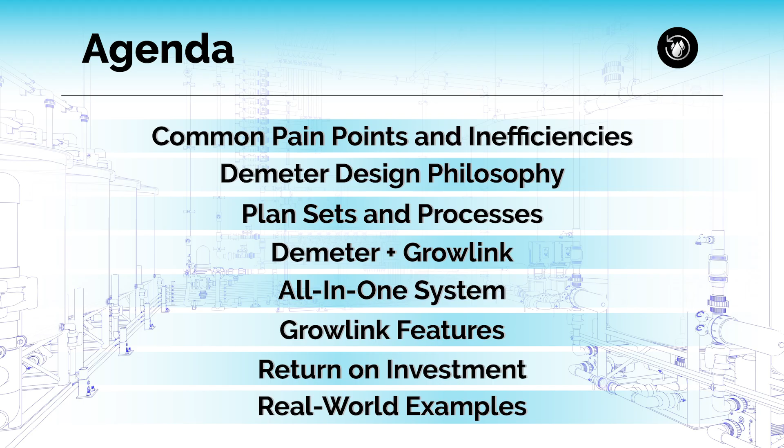Thanks for joining us today. This webinar is for owners, operators, and growers to understand how a properly designed irrigation system can help you become more profitable. We're going to be covering how plumbing and irrigation design, along with proper controls, improves efficiency and yields. Very often we still see lighting, mechanical, benching coming first, and no thoughtful irrigation design, maybe no dedicated water room, kind of being an afterthought after some of the big ticket items, and rightfully so.

But even after all these years and a lot of advancements in automation, we oftentimes see a total lack of thoughtful irrigation layouts. The irrigation system is the lifeblood of the facility and should be treated as an important part of the design process, not an afterthought. Mostly people think, oh, maybe my plumber can just quickly install an irrigation system for me, and that's really not the case. We see these common pain points all the time in facilities, whether it's a new build out or an existing building, and I'm sure some of you can relate to what we're about to talk about.

Going into a new project with no plan set for irrigation, no materials list, and no direction, you're just relying on your plumber who is not an irrigation expert. Or we've built facilities before, we'll just figure it out. Well, this worked here, maybe it'll work here, but you're scaling up tenfold, and it's just not the case. And then going into it with no parts list and no direction, you're going to overbuy or underbuy, and it's going to delay the project, and you're going to be wasting money on that build out in time spent and labor trying to figure out how to get this system together.

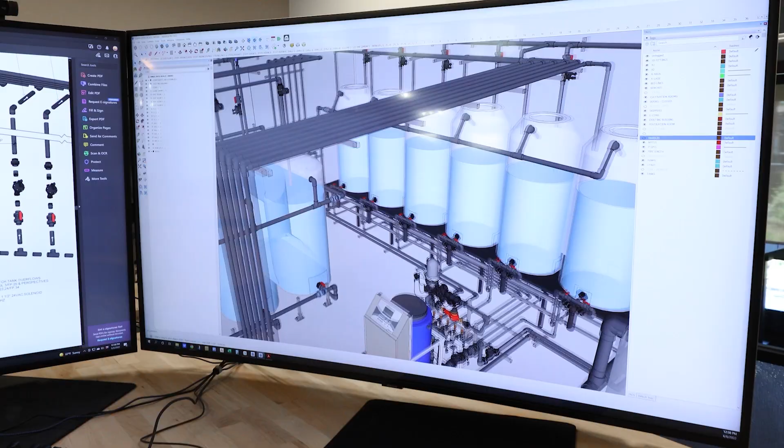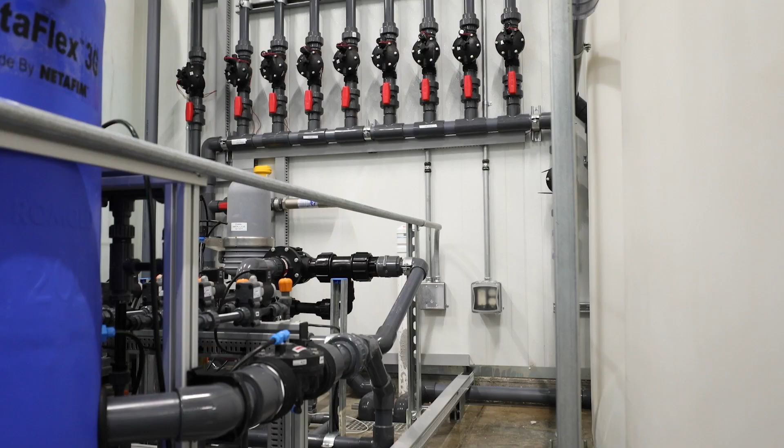Yeah, absolutely. As a cultivator myself, when I'm designing, I'm thinking about this as my facility, this is how I would want to run it every single day. When we're designing the fertigation room, we're looking at processes. Okay, we're going to bring in nutrients through this door here, going to concentrate stock solution here, moving into fertigation, moving into batch as an even nice flow for the room, putting valves in places where they're easy to access, where maybe some designers just aren't thinking about that from an operator standpoint.

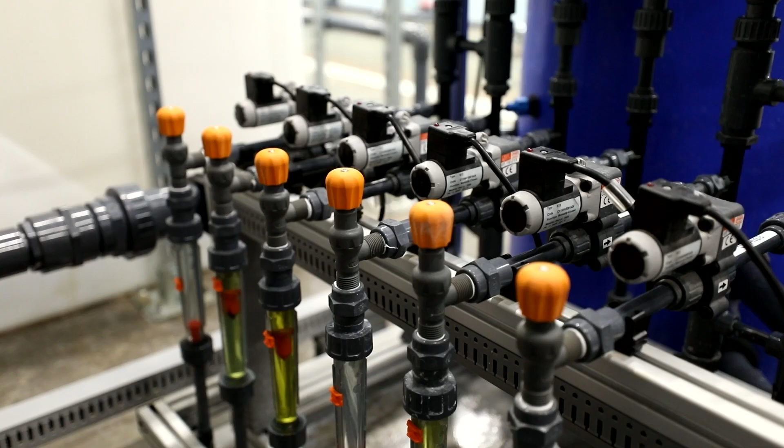Like, hey, we actually have to use this system. Somebody has to get up to that valve above the tank that's 10 feet tall and turn it. No, that doesn't work. So treating it like it's my own gives the operator such a nice facility to run that they're going to want to be in.

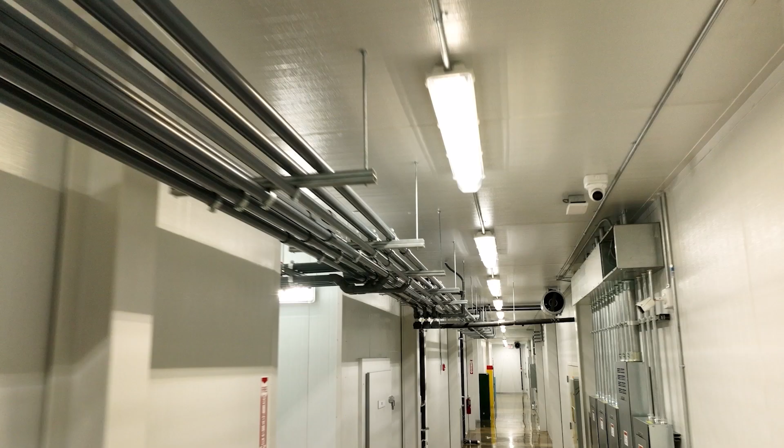They're not going to be cursing every single day when they're in there getting the fertigation room running, and also building that room efficiently so you're not spending a lot of time in it. Having the right systems in place allows us to make a room that is so efficient that all you really need to be doing in there is making sure your stock solutions are full, and you step away from the room once it's calibrated and ready to go.

Coming off of your philosophy, tell us what a typical design plan and the process behind that looks like. Yeah, the process is pretty simple and straightforward.

We work with you to figure out what your level of comfort is with technology, what level of automation you want to have in the building, what your budget is, and also what makes sense for the scale of the building. What works in a large scale facility is overkill for a smaller facility and vice versa. So that's something we definitely take into mind.

We go through that design conversation in the beginning. It's a 1 to 2 hour phone call with the customer, and we talk about all the features and additions that they could ever want in the facility. Like, was there something in the past that you wish you had, or is there a feature that you dreamt about that you wish you had? We'll come up with that new solution for you.

Not every one of our plan sets is cookie cutter. As a matter of fact, no plans from us are cookie cutter. Every facility is designed one-off for the customer every single time to meet their needs and their requirements for their style of growing.

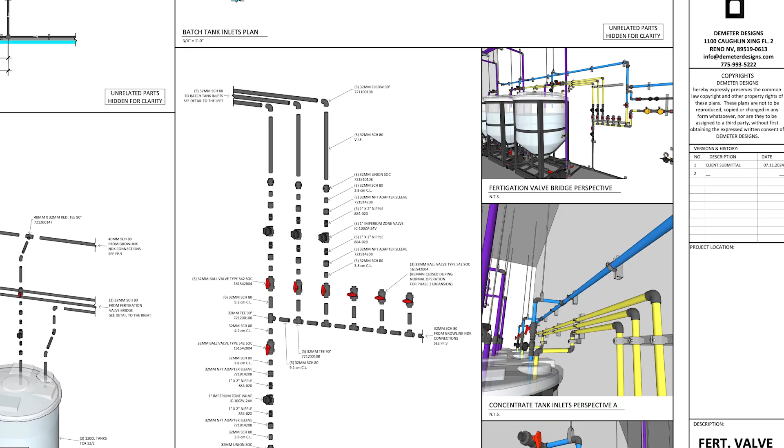So phase 1 is here, this is where we stop the scope of the phase, and then we pick up here. We'll separate the parts list, we'll break apart the plans so your plumbers know, okay, we're going to start here for phase 1, and we pick up phase 2. We already know what we need to purchase and what that design looks like, so we can easily move forward with it.

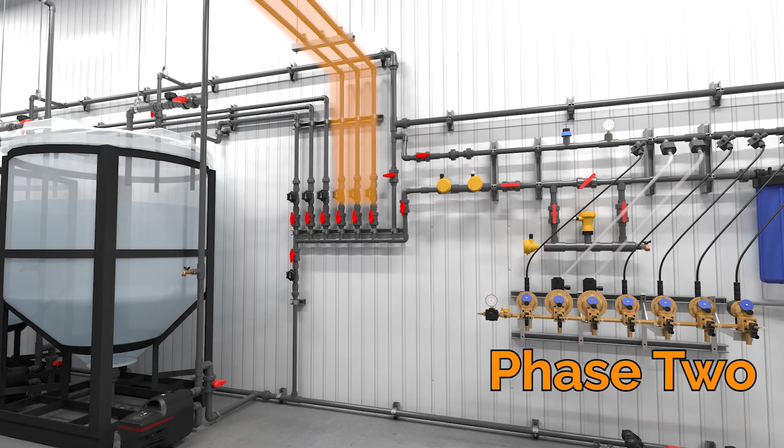Also, in that phased construction approach, I think it's very important the way that we design it does not interrupt phase 1 when we go into phase 2. You can kind of continue operations, easily almost copy paste into the next phase.

And we don't ever have to take anything offline. Phase 1 just keeps running, and we plumb right into it and open a valve, and it continues down the way. That's great, no downtime. That's really important when we're operating at scale.

What our plan sets look like, they're much, much different than anybody else's plans. I think we have the most detailed plan sets in the industry, and what that leads to is labor savings and cost savings on installation. No mistakes, no missing items, no 'hey what am I supposed to do with this, ball valve or...'

And if you're hiring a plumber and say you're out of the country, chances are they've never seen anything like this before. They have zero experience with any irrigation or fertigation plans or design. So we keep that in mind when we're designing these plans. No matter where you are in the world, I say this to everybody, if you can read a tape measure and you can cut and glue pipe, you can install our systems. I think that's really important.

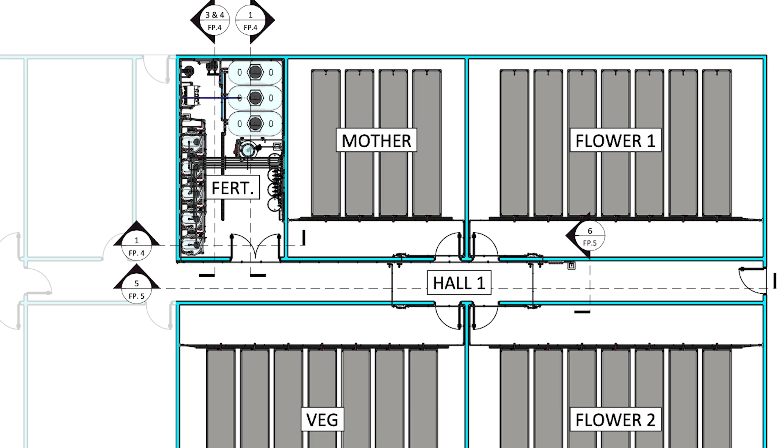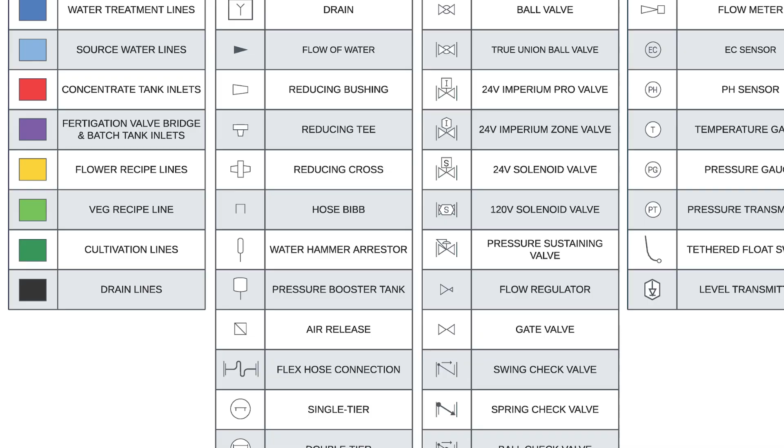So what that looks like, we have our floor plans and elevations, which are standard in every plan set. We provide process instrumentation diagrams, which are simple line drawings. It shows the pipe diameters and the flow and where all the equipment call-outs are, what your wire tags are. So when we're talking with GrowLink, when your low voltage installers are wiring everything, it's the same on the plan sets as it is in the panel. That's important.

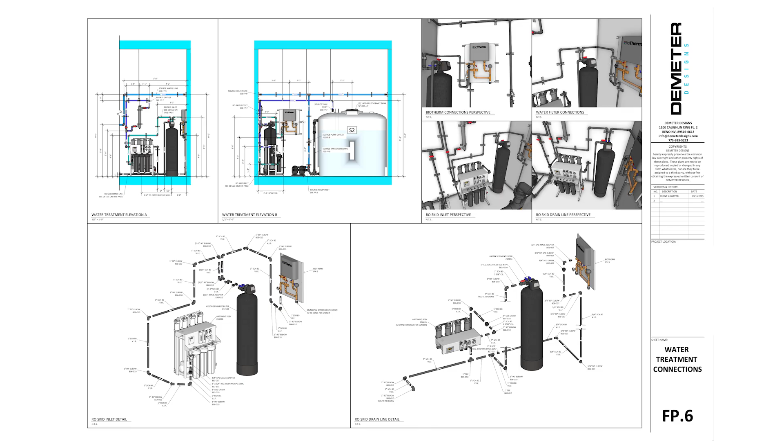And then we go into our assembly sheets. This is the bread and butter of what we do, and this is what makes it so anyone in the world could install our plans. So we take every single assembly from the RO holding tank all the way to the dripper on the table, and we break it into small chunks into these assemblies.

Easy to digest, almost phasing the installation within the diagram. Correct. It's your day 1, I'm starting here. Day 2, I'm going here. And it turns it into a Lego set or an IKEA set of plans that allow you to easily see what you need to do for the day.

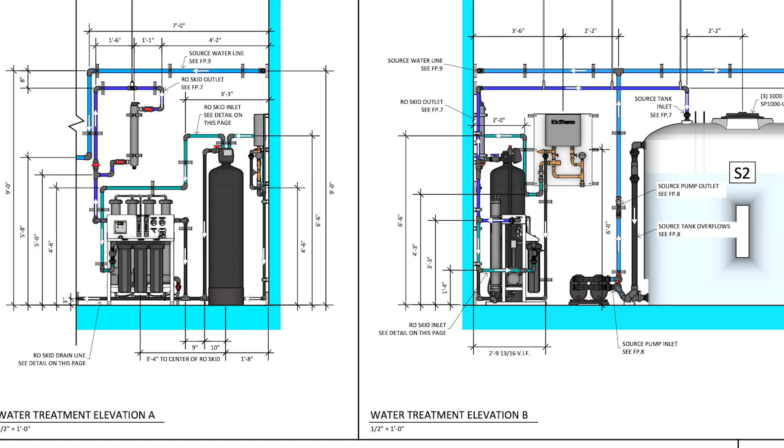There's a floor plan and an elevation showing that assembly. There's a 3D exploded diagram of that assembly that shows you how to build it down to the cut length of every single section of pipe, accurate within 1/16 of an inch. And what's showing up on site is basically perfectly aligned with what's on the diagram.

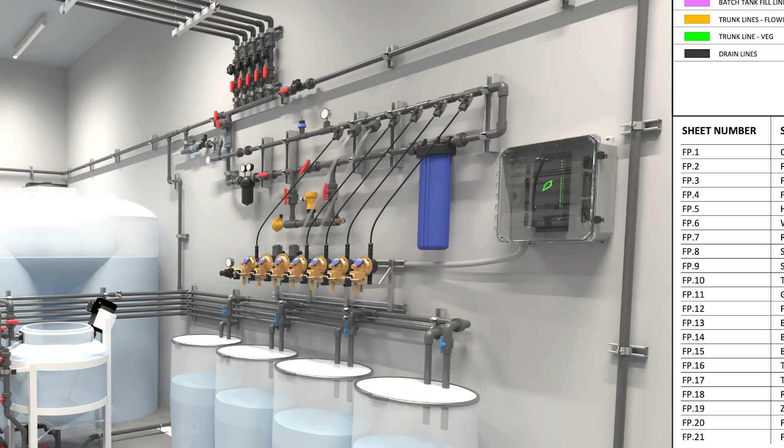Correct. And on that sheet, we have a 3D perspective view of what it should look like when it's completed. Before anything's ever built, we show you what it should look like when it's done. So we do that, again, from the RO holding tank all the way to the dripper on the table.

We also include a complete bill of materials. Every single part and piece that you need to build out our system—every elbow, T, valve, tank. Kind of lay everything out and look at it before you even start on day 1.

You know that when that equipment arrives, your installers have zero excuses, right? Here's your Lego set of plans, here's your pallet of materials, it's all accounted for, get to work. Because when an installer doesn't think of all the materials that they need—which is impossible without a fully engineered plan set.

How many quick trips to the local hardware store or plumbing store are you going to make to get that one thing you forgot? Hopefully they have it in stock. And then productivity is lost.

When you stop your workflow for the day as an installer and you go to the supply house and come back, you've got to get back in the groove again. So it's not just a quick trip to the store—you just lost an hour or two of productivity, maybe even a day or two. Especially if things are out of stock. So making sure everything is there on day one when you start the build out is instrumental to saving money and being efficient in that process.

Elaborating on all of that, we also do equipment procurement for our customers. We sell all of our equipment at wholesale to the customer. Huge, right? When you're buying things from your plumbers, they're charging you retail plus their markup. So the money you're spending for the plans is almost immediately saved in the materials, not to mention the labor savings on top of that and making sure the installation is going seamlessly.

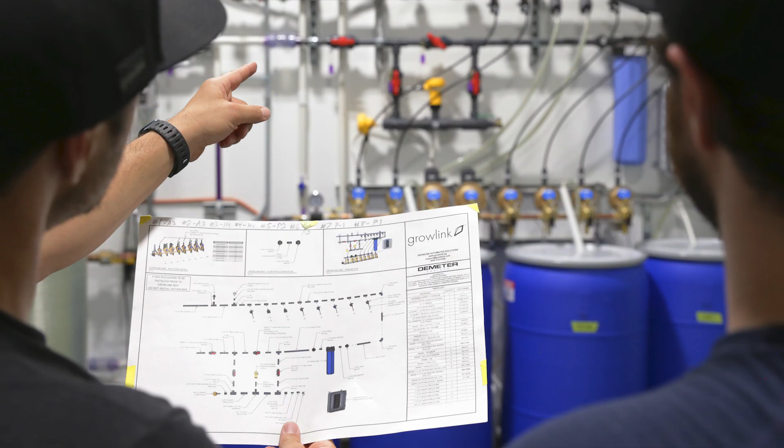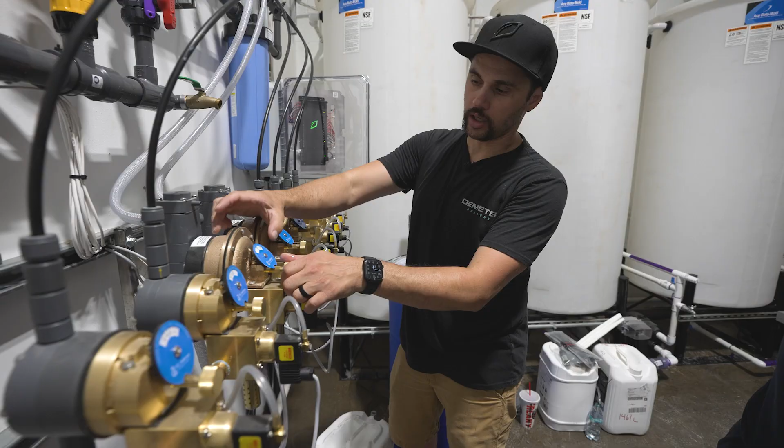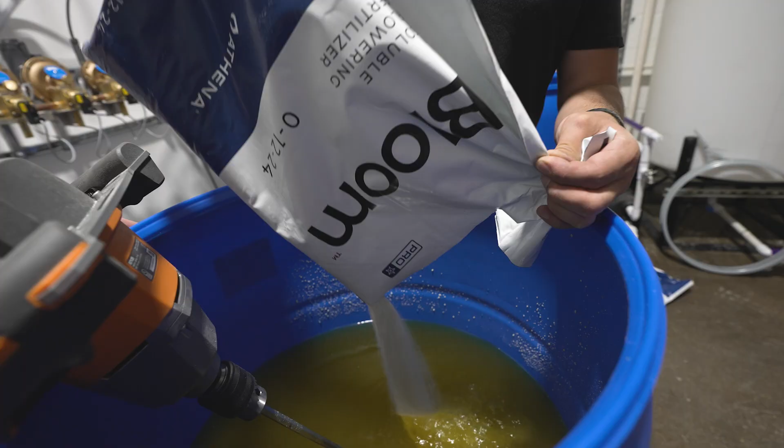We also offer installation support, installer recommendations, and on-site training and commissioning for the systems. As a cultivator myself who has used the GrowLink platform for a few years, I know that system inside and out. When I get on site, I'm going to help start up that system, calibrate all your pumps, do all your valve validations, train you on all your SOPs, do all the pump calibrations, build your recipes with you, build stock tank solutions—everything to get that water room up and running and moving water to the rooms. I'm going to help you start all that up.

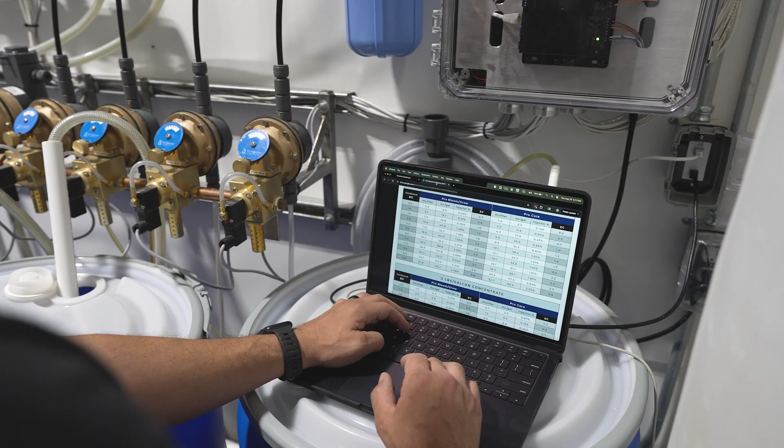And then I'm going to train you on the platform as a grower. These are things and tools that I've used in my day-to-day operations that make my life easy, and all these fail-safes that I've brought into place to make sure my garden is successful. So I can give that to you immediately.

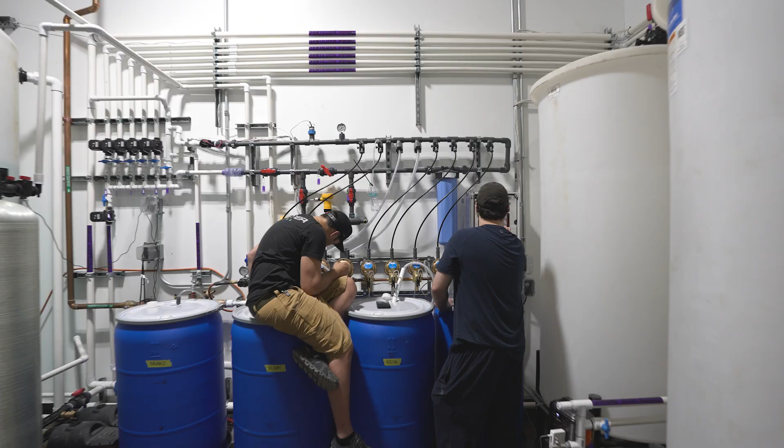I think that initial onboarding process is so important. I always tell people, we don't expect you to be experts on day one. This is an intuitive platform, something that's easy to use, but there's a learning curve—you've got to find out what it means to you and your facility. But I'll come in and shave 6 months of learning curve right off in the first week I'm there with you. That's awesome.

Yeah, that's a little bit about our process and how things work at Demeter Designs. Now that we've talked about my design process, let's talk about what the GrowLink Demeter process looks like in the background.

I think the biggest thing is we're so consistent and familiar with our approaches. I've got a pretty good feel for what your design philosophy is, depending on the size of the project—what's our cultivation strategy, what's the size unit or the model unit needed to make this all work in concert and harmony together. Ultimately, fewer meetings.

That's what we find this leads to the most. It is not uncommon to see Sean or myself introduce a project to each other, backdoor conversations happening where here's the size of the project, here's the valve schedule, here's the sensor layout, here's the size unit we need, what flow rate and recipe they're going to be using. Right away we come forth to the customer, if not the first meeting, with hey, we've already got a solution in place. We want to make sure this meets your needs, meets your budget, review it with you, and we're moving forward. A lot of times that's happening, if not the same day, within 24 hours.

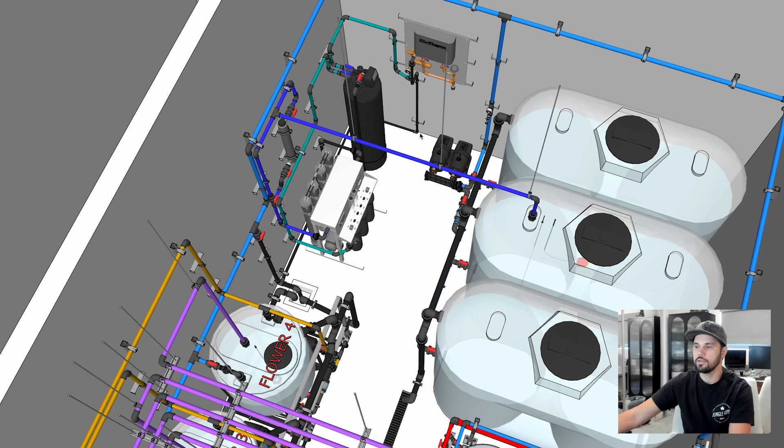I think between our process with the client, it's the first 2-hour meeting on what they're after, what kind of feature sets they want. We get to work, we build a 3D model, we have a 1-hour review, make sure the client likes it. From there, behind the scenes, the client's already done. There's no more meetings with the client that they have to sit in weekly or bi-weekly. We want your opinion on this, here's what we need from you. It's a couple hours, and then the customer can step away and concentrate on the rest of the build out. There's a lot of moving parts to this, so getting slimmer meetings is huge for everybody. Nobody likes being stuck in meetings all day.

And I think that's kind of the value play with working with both GrowLink and Demeter. You're getting a confident team that's worked on dozens of projects together, that has between us decades of experience that comes forward with a solution tailored to the project. So I think there's a really nice handshake between Demeter's design philosophy, the performance of our system, and totally closing the loop on having one platform, one set of voices or support opinions to work with that are meeting the needs of cultivation.

Absolutely. The biggest advantage of using GrowLink is having nutrient delivery, climate control, lighting control, irrigation, all of your sensor monitoring on one platform. Nearly every retrofit project we've come across, especially in recent years, a lot of them are using a different vendor for nutrient delivery. They've got a separate company for climate control, maybe a separate company for substrate monitoring, and a different company for irrigation control. So now you've got 4 different apps or 4 different portals to log into, on top of adding to the list of people that you need to call should you need support. I think that omni-channel approach creates wild inefficiencies.

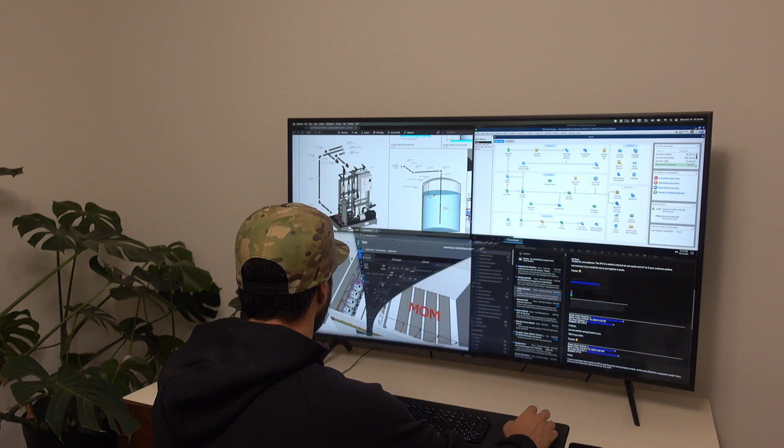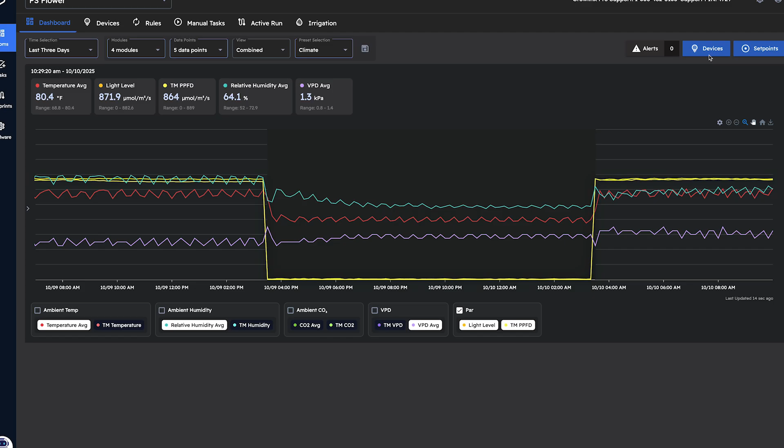that my facility is running properly. We use Blueprints, we use Copilot, we use all of these different platforms that are built in. So really all I have to do is for 5 minutes a day, I log in on the web portal, I go to my preset dashboards that I've already built, I check out my climate, make sure that those have all been trending for my VPD, my RH, my temperature, my CO2, make sure all of that's been in check, my lighting's in check, and then I bump over to my other dashboard, look at my drybacks real quick, make sure all that looks good for me.

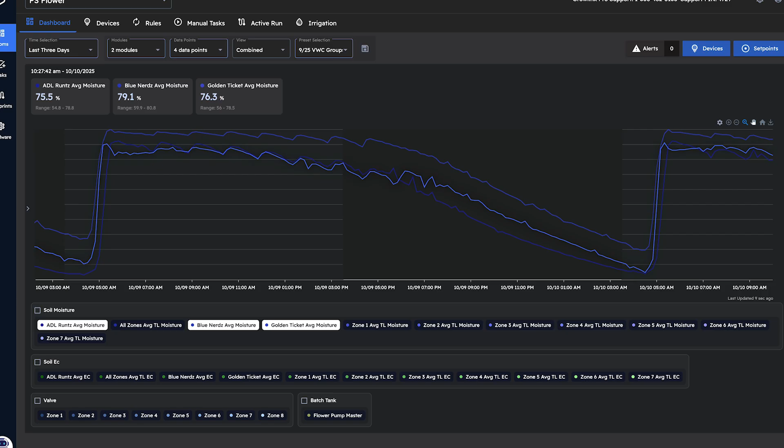I'm an irrigation nerd, so a lot of times I'm not using Copilot. I really want to tweak and manually adjust things on my own. So I'm looking at that sensor data from my TerraLinks and then making my decisions on what I want to do for the next day in the irrigation programs.

But I'm traveling a lot also for work, right? I don't have time to be a nerd all the time. When I do, I love it, it's kind of a luxury. Like sometimes you want to get in there and just play around. But when I'm traveling abroad in Europe for a trade show or I'm at a commissioning, I don't have time to do that. So I'll turn on Copilot with my set parameters and let it run, and it works amazingly well, right? It just takes that away.

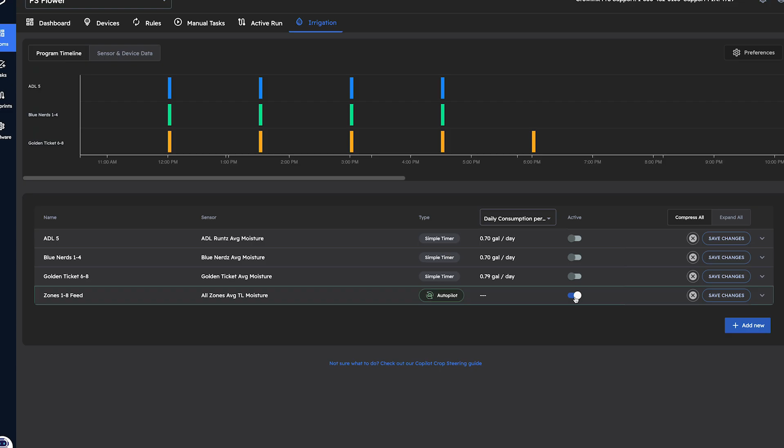And then the Blueprints, I set my day-to-day parameters for the entire grow cycle in one blueprint, and then when I plant the room, I just hit go. And I know that my climate settings, my lighting settings, everything is changing and shifting how I want it to day to day, and I don't have to manage a calendar and make all those manual set point changes every single day. It takes that off my plate.

So you basically could pre-program your entire cultivation cycle, upload it to your controller, and have peace of mind while you're on the road. Done. Yeah, and in 5 minutes a day, if that, I can rip through, make sure everything's operating properly, and then go about my real job, Demeter Designs, right?

Sure. And for the cultivator, when we're running a multi-room facility, having Blueprints in place, Copilot in place, takes so much labor off of the operator. It's crazy to me how much time you don't need to spend in there and how well the room actually runs.

Our R&D facility, when I'm on the road traveling, sometimes I'm gone for a week, 2 weeks, and I can comfortably walk away from the facility for 2 weeks at a time, and I know that my grow is safe because I have sensors in place, alerts in place, that if anything happens, I immediately get a text message on my phone, my Apple Watch goes off, I get an email about it, red flags everywhere, something's wrong, I can log in real quick and make an adjustment or make a phone call to have somebody stop by and fix it. But I have that peace of mind where I can step away, right?

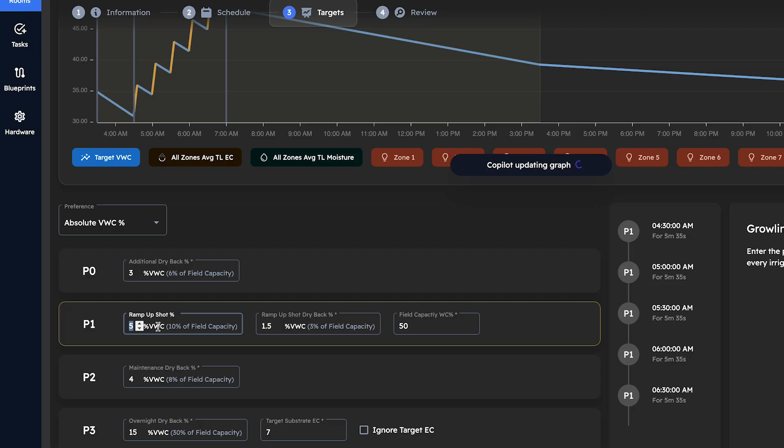And that's what I really like about the irrigation features within GrowLink, is it takes the guesswork out of it. You can come in, set your media type and size, your drip emitter size, what your steering method is. You can hit all of your schedule-based timers, and then filter in what your field capacity is, what your overnight dryback is, even what you want your target substrate EC to be.

And what's nice is you have choices beyond that on how much further you want to go. If you want to use Copilot, you can wake up every morning and review the suggestions from the day prior and choose whether or not you want to apply what it's recommending. You can even take the leap to autopilot, if you know you're going to be totally off the grid for 2 weeks and want to automate everything - here's the program, here's what we're trying to achieve, just do it and execute on it.

And I think, aside from the efficiencies, there's an educational component to that. With Copilot providing you a report card on what happened yesterday - we're recommending this because we saw this, so we're going to make this exact change. But if you don't want to do that, great, but you're still learning. And as your plants are evolving, as that root mass grows, as different genetics and cultivars take water and nutrients differently, therein lies the difference.

And I think just the daily impact that that's going to have over time. We mentioned the differences between spot checking and consistent data. Well, here we're getting consistent data, and we're taking that a really strong step forward by providing an educational component, but you can still be behind the steering wheel.

You can be the one who's driving that change. And then if you get the outcomes that you're looking for - if we're really hitting the yields you're looking for, the quality is there - you can take that next step to autopilot, and you can take your hands off the wheel and just let it do its thing.

Yeah, you can tiptoe into it. You don't have to go full bore into autopilot. You can really test the system and see how it's going to react with Copilot and say, yes, I like that change, apply it. And then once you get through a cycle and you're like, yeah, it actually does know what it's talking about, you can click that autopilot button and really step away from it for a while. Obviously, you still have all those alerts and sensor triggers in place in case something goes awry.

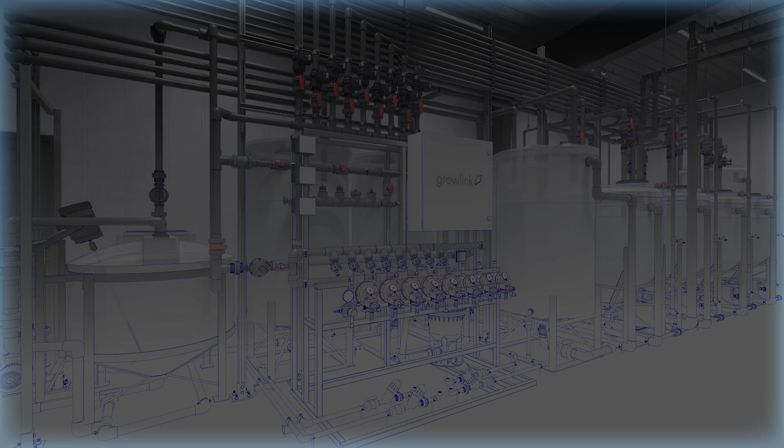Yeah, absolutely. Why don't we take a look at a couple different facility examples to show the different sizes and scales of the projects that we often support and the solutions behind them.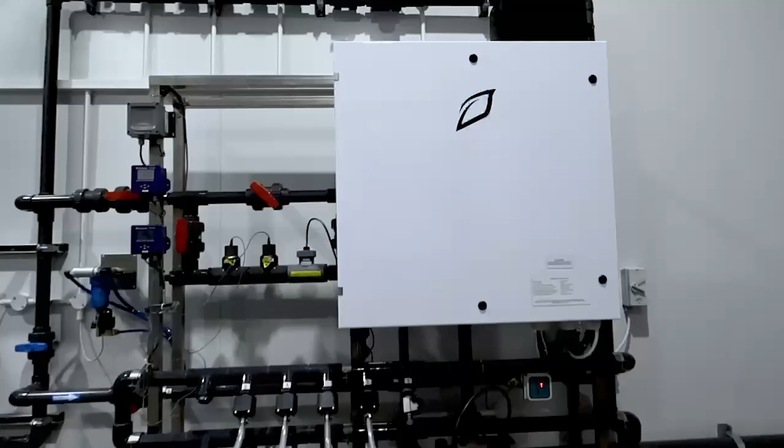Sure. This first one we're looking at here is roughly 65,000 square feet. It is Biogenetics in Johannesburg, South Africa. It is a EU GMP and GACP certified facility. They're running a GrowLink NDS system there, Grundfos pumps, Moleaer dissolved oxygen system, Netafim irrigation equipment, beautifully laid out facility, super clean, and GrowLink had a large part in this as well.

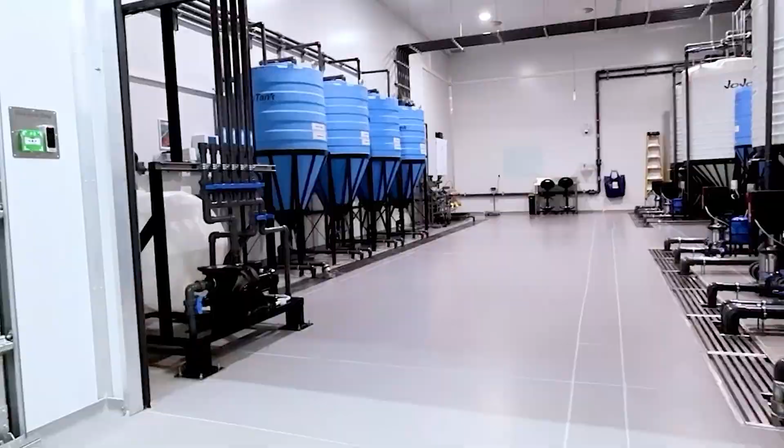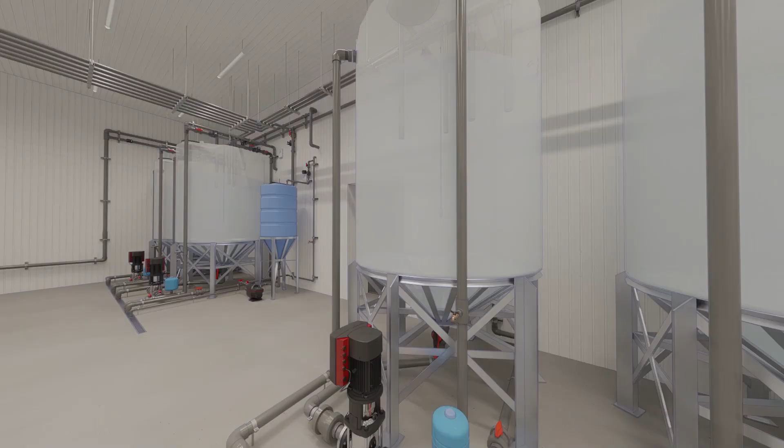Why don't you tell me about that? Yeah, so starting with the water room, we have the GrowLink NDS, the nutrient delivery system. What's different about the NDS versus the NDK? This is a custom built solution. We can customize the amount of injectors, the size of the manifold, and then it comes on a pre-assembled frame, kind of a stainless steel frame. So it's kind of a drop-in, ready to be installed unit. Higher flow rate volumes, typically a larger blend tank. It's kind of meant to support a larger cultivation footprint.

Outside of that, we've got our custom core control panels in place in the hallways just to manage climate, lighting, and irrigation. These are UL and CE certified panels. Again, a custom built solution that's meant to be intended for its project. So depending on the scope of control, the amount of devices that we're controlling, where their panels need to be located, all of that contributes to how many panels we have and kind of closes the loop on climate, irrigation, and nutrient delivery.

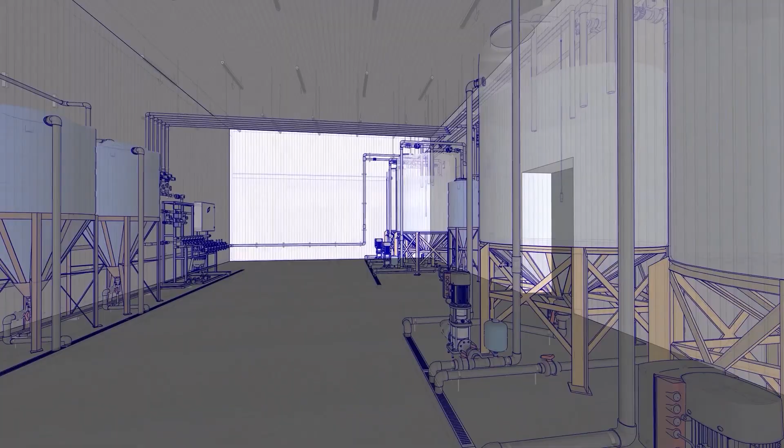Yeah, these guys really went all out here with all the bells and whistles that GrowLink and Demeter both have to offer. Super clean build. We're really excited to see this facility come online this year.

All right, well, let's take a look at a smaller craft cannabis project that we both worked on earlier this summer, Nixon Cannabis. Now for Nixon, we use the nutrient delivery kit, or the NDK, which is a self-assembled and self-install, kind of pared down version of the NDS. Still gives you all of the access to the same features, but a little bit more of an economically priced solution for maybe a little bit more of a smaller project than what we saw with Biogenetics.

And we're fortunate enough to have some facility walkthrough footage of you going through Nixon Cannabis, kind of telling us more about what went into the implementation and the design, even the installation of all of this.

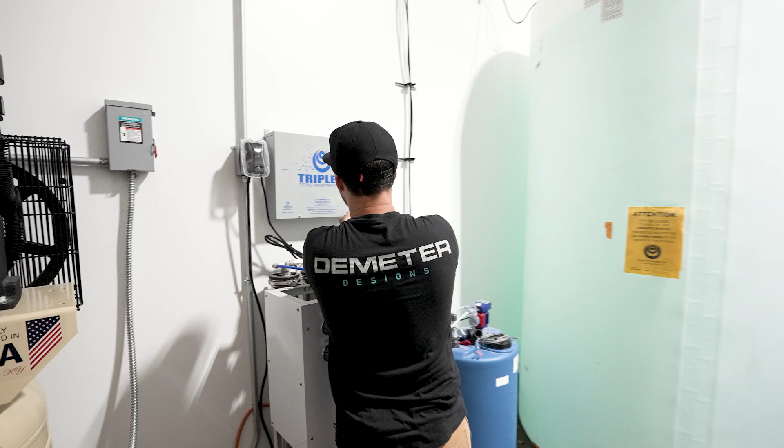Take it away. We're here at Nixon Cannabis in Illinois, a craft producer, about 5,000 square feet of flowering canopy. They came to us looking for a cost-effective, simple solution for fertigation and irrigation while remaining budget conscious, while also getting a bunch of data back so that they can log and remotely monitor, as well as have full control over the facility. We have our air compressor here to run our Anderson skid operated by the GrowLink NDK system, a new stream filtration with anti-scalant, and a triple ozone system for ozone generation in the water, keeps everything moving, keeps everything sterile.

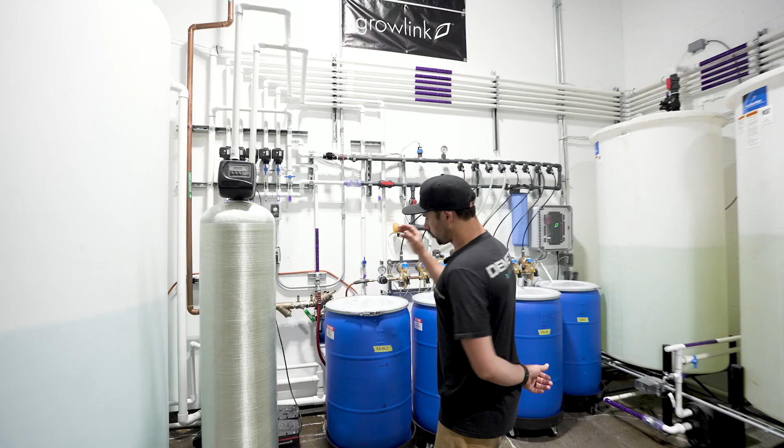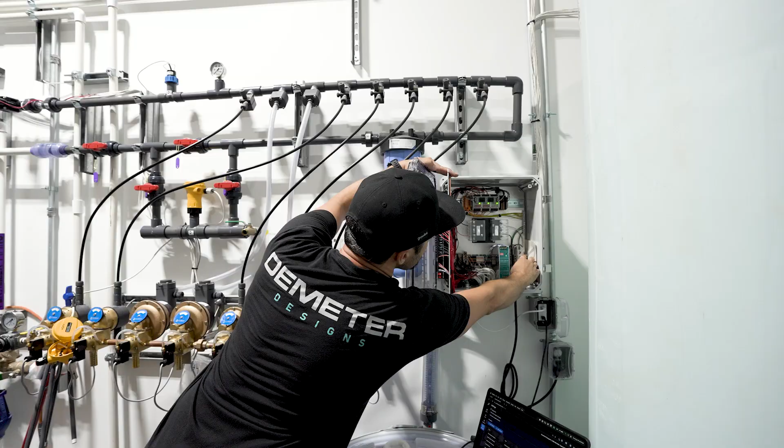Working our way over here, redundant Grundfos pumps for our pressure boosting off of the RO tank. Of course, the GrowLink NDK skid, a very cost-effective solution for craft producers all over the world. H.E. Anderson pumpers come with that.

Concentrate stock solution is in 55-gallon drums, mixing Athena Pro line here with a couple little additives that they wanted to add in. Of course, every system's custom tailored, so you can put whatever you want together, and we're happy to design that for you guys.

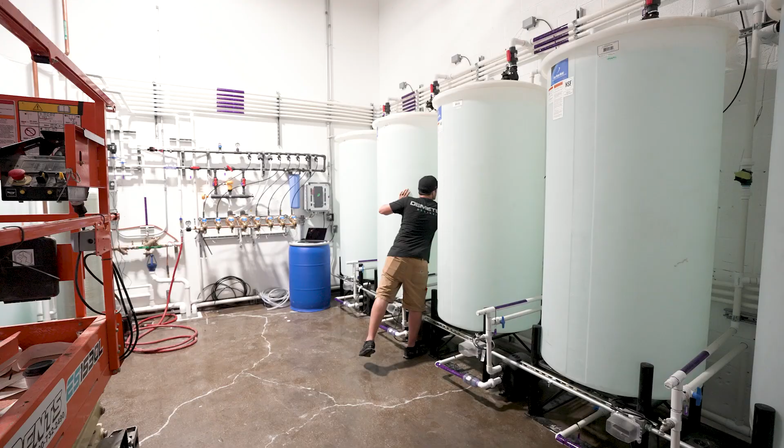That comes across on the output side of the skid. We have an Imperium valve bridge here that moves over to our batch tanks. The batch tanks have automated recirculation on them as well as automated RO fills. If anything were to go down potentially, we have backup storage here. We went with 325 gallon batch tanks here, just in case something, God forbid, happens, we have redundancy.

So these guys can automatically go in here, fill them with RO, turn on the recirculation for these, and then manually add their nutrients if something happened on the back end, right? Keeps them moving. In normal operation, we're probably gonna run these about 50% capacity so that we're getting drain downs and refills more often throughout the day. Again, this is only about 5,000 square feet of flowering canopy, so we didn't wanna go too crazy here.

We want to make the nutrients, use the nutrients, keep things moving and fresh. Coming down, we have Grundfos boosting pumps here as well. All of these are room tanks for this facility. They opted to do a tank per room for maximum flexibility.

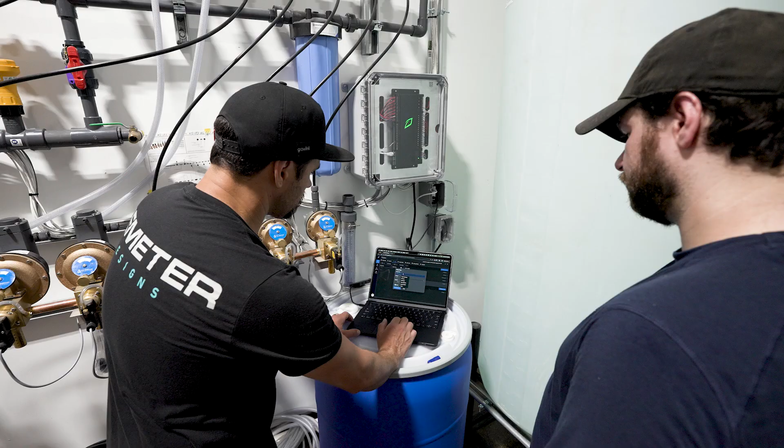The NDK can make an endless amount of recipes. So depending on how they're feeling, if they want to do some R&D in a room, or change the EC values pretty often, they're not locked into recipe tanks here. Since it's a craft site, there aren't that many flower rooms, so we didn't need to go crazy. It's only 5 tanks, and then they have the most flexibility possible. This is a very budget-friendly build.

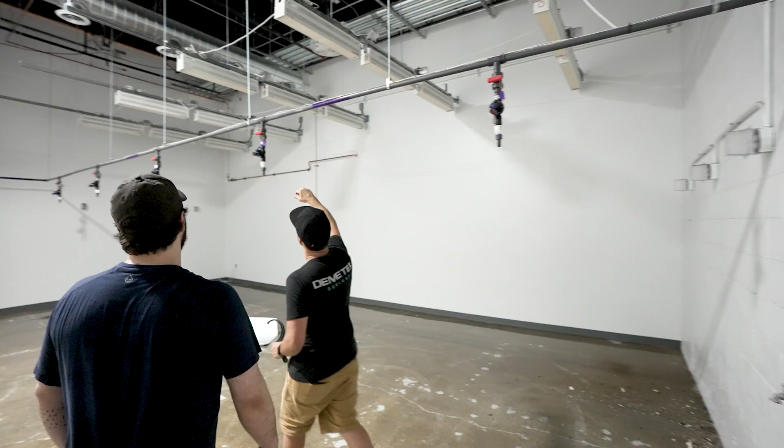They opted to go with Schedule 40 piping in the room here. This is a low light environment, so we don't have to worry about algae and biofilm buildup from light penetration into the pipes. But of course, when we get down through the corridors and into the cultivation rooms, we go to Schedule 80 piping. High light environments always need to be in Schedule 80 so we don't get that algae and buildup in the pipes. Let's take a look down at one of the rooms.

Of course, we're still under construction. We've got a couple more months here, or maybe about a month left, but we're out on site right now just finishing up the commissioning. Room lines come up and overhead here, as well as we have RO going to every one of the rooms on a hose bib. Come on in here.

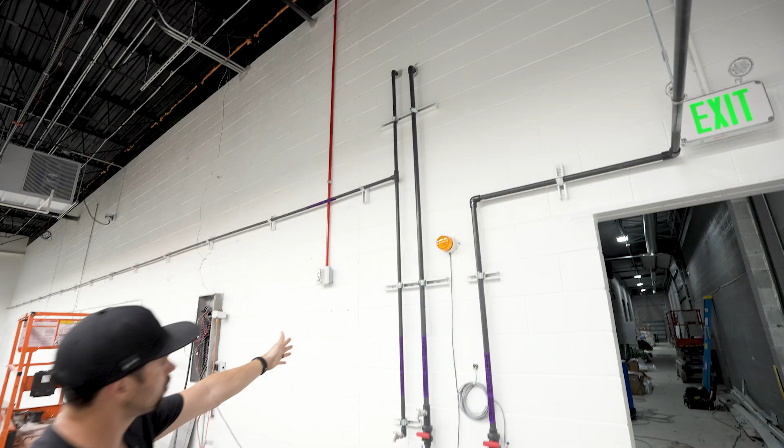You can see right there up top, we are transitioning from the Schedule 40 to the Schedule 80 piping in the room. We have our RO line on the left, our fertilizer line here on the right. That comes through to a filter. We have a hose bib for on-demand feeding as well in case they want to hand water, do anything like that, do a spot check or a spot feed. We have the option to do that on demand here.

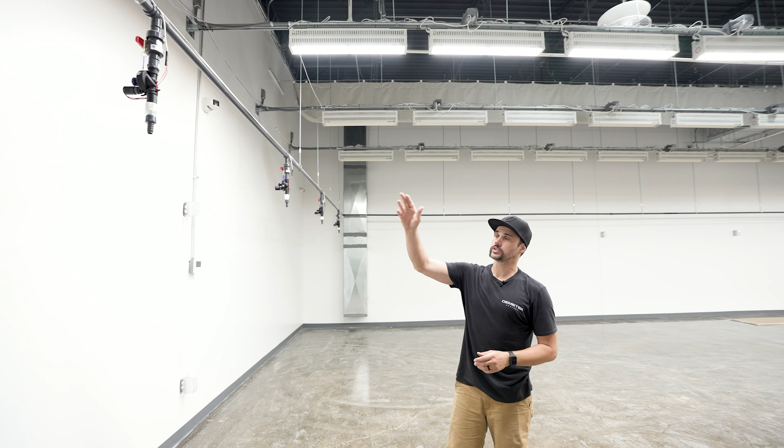That comes up overhead, and we have every row. There's going to be 4 long benches in this room for veg. Every one is individualized with its own zone, and then it heads down, and we have a nursery in that back room over there with 5 more zones in there. That's going to handle all of our moms and some overflow veg, and then there's a purge on the end of that line here. All of our valve control and substrate monitoring in this facility is monitored by GrowLink as well.

Every valve, again, is its own zone. Coming back to the PIC controller over here, never mind the wiring - obviously, we're still in construction here. We don't have benches or zone drops installed yet, but we're working on it. Give us a month, we'll be operational.

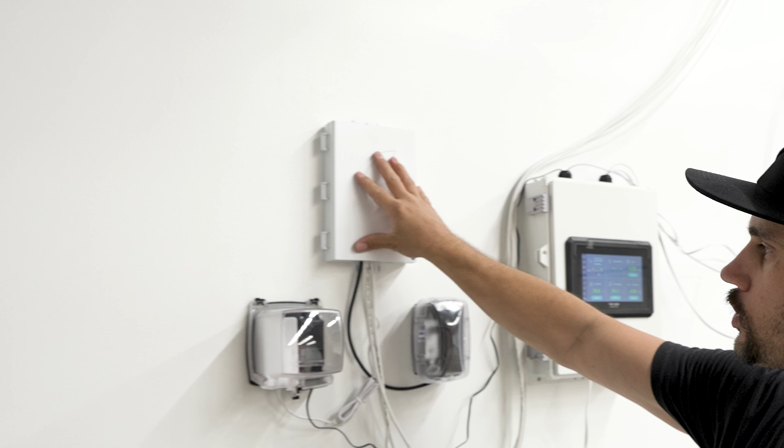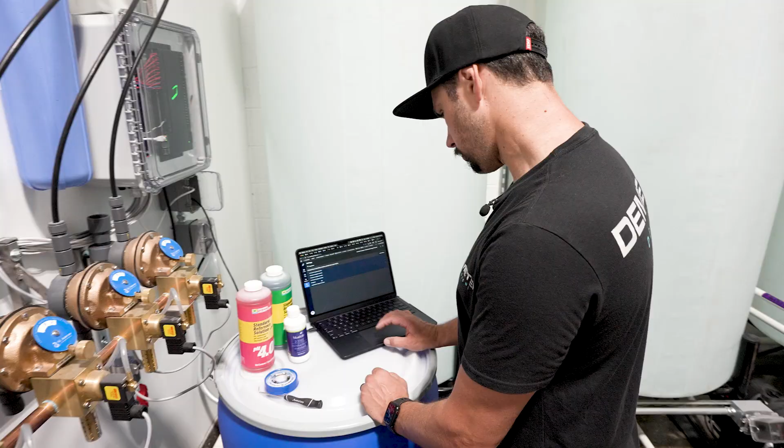Substrate sensors and valve control coming from here. We can do co-pilot, autopilot, manual irrigation events, any kind of scheduling we want, ultimate flexibility. We can have sensor triggers, automating all of our feeds. We can have safeties built in place. It's really important that we tie our substrate sensing to our valve control for ultimate comfort and reliability here. We don't have to worry about any mishaps with anything drying back too far. So that's why we choose to use GrowLink substrate monitoring, because it ties back to our fertigation, it ties back to our irrigation. The whole system is one holistic environment talking to itself.

All right, that wraps it up here at Nixon Cannabis. Of course, this whole facility, in terms of irrigation and fertigation, was designed by Demeter Designs. We also supplied all of the equipment you see in this room and in the cultivation rooms. We handle everything in terms of your install support, your procurement, your design, all the engineering on everything. We can do this for any facility anywhere in the world, very cost effective. It helped out the installers quite a bit having our design plans, and they got this done for a very affordable price. Pretty much everything's taken care of in the design.

We tell you how long to cut the pipe and all of the parts and pieces that you need. Saves a ton of money on the labor. They knocked out this project in less than a week, I think, to get this room done, and then another week to do all the cultivation room. So lightning fast installation. Team did a great job. Thanks for tagging along with us. Hope you enjoyed what you saw here today.